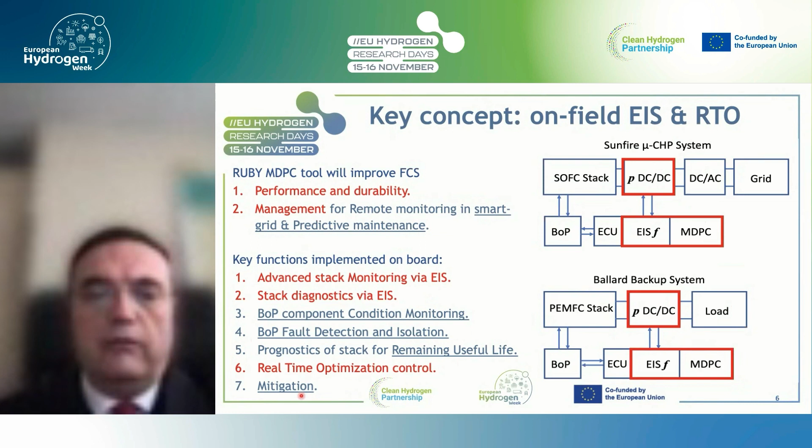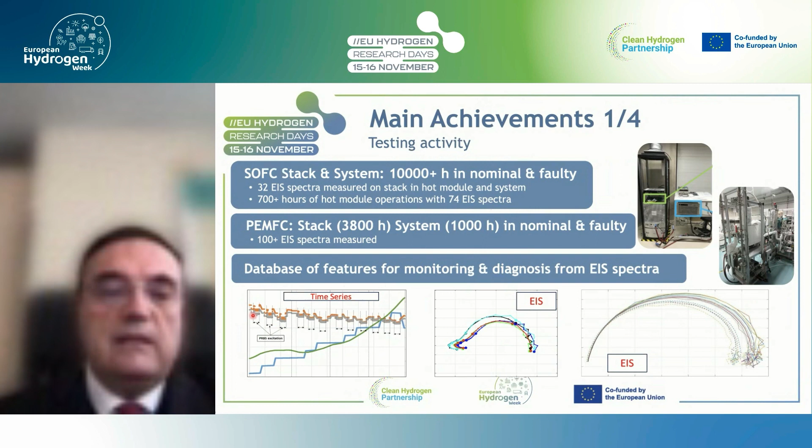And then we built a database of features for monitoring and diagnostics from EIS spectra. So this is, for example, on the right, one example on PEM stack, and this is on solid oxide, and this is a time series that have been recorded.

Then the second achievement is in terms of algorithm. So we have EIS diagnostics, the use of equivalent circuit modeling for parameter identification from the stack, the balance of plant diagnosis. We use also machine learning recurrent neural networks in order to have direct monitoring of the voltage on the field, and then the support of multi-scale analysis for solid oxide in order to better understand some phenomena like degradation, and also the state of health with advanced models, and also the RTO, which takes into account the current constraints or the constraints imposed by the users.

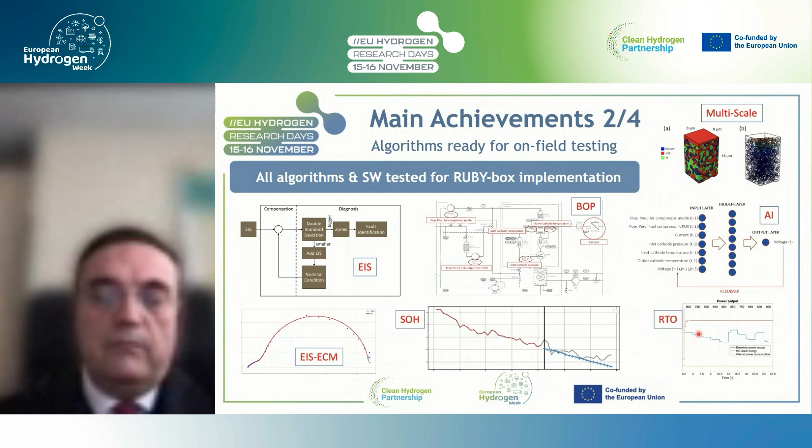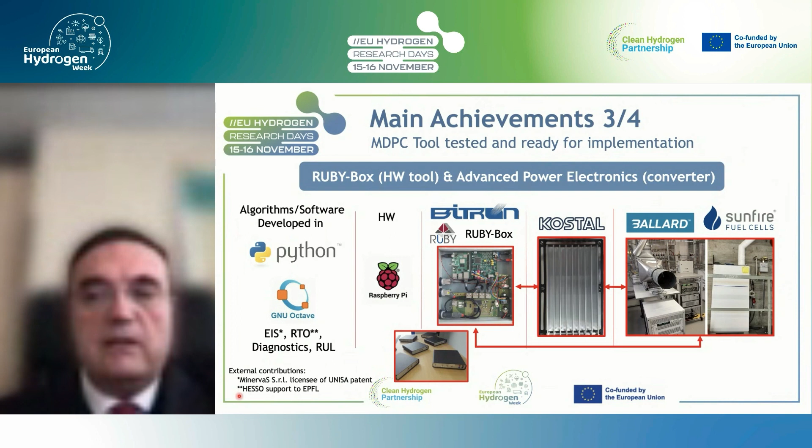We use algorithms that have been developed in open source languages, and then we are also getting the support of a third party like this company Minervas that has a patent from University of Salerno, and then from HESSO, which is a university in Switzerland.

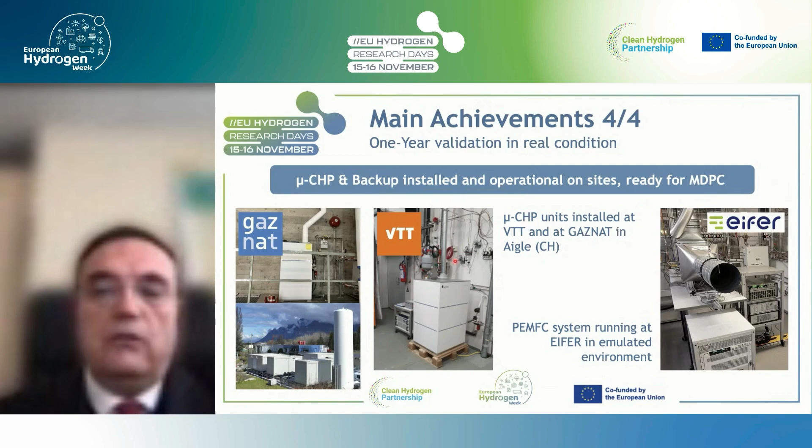Then the last achievement is the implementation of the 2 solid oxide micro CHP systems on the Gaznat site here in Switzerland. It is a real site, so we will not pay likely the gas that we are going to use, and then we will use this system in a real environment, and this is within the lab of the VTT in operational conditions. And then on the right side, the tests on PEM at EIFER.

We had one problem with one partner that left the project, and in 5 months, thanks to support of the JU, we were able to get on board Sunfire, and we are very grateful to Sunfire who trusted in our project, and of course to the support of Eleni and her colleagues before. And then also there was a risk in terms of shortage of electronic components during pandemics, but luckily this problem was overcome. Otherwise, the device would have cost more.

The device actually, in terms of Ruby box, will cost, as target of the topic, less than 5% of the overall cost. Then the challenges were to adapt the experimental activity to the new Sunfire system. So we had to run fast in order to have new experiments from another system. Then the new scheme of the DC-DC converter in order to fit in both systems; it was not easy to identify the configuration and also the topology, reconfiguring the power electronics in order to perform the EIS on the stack.

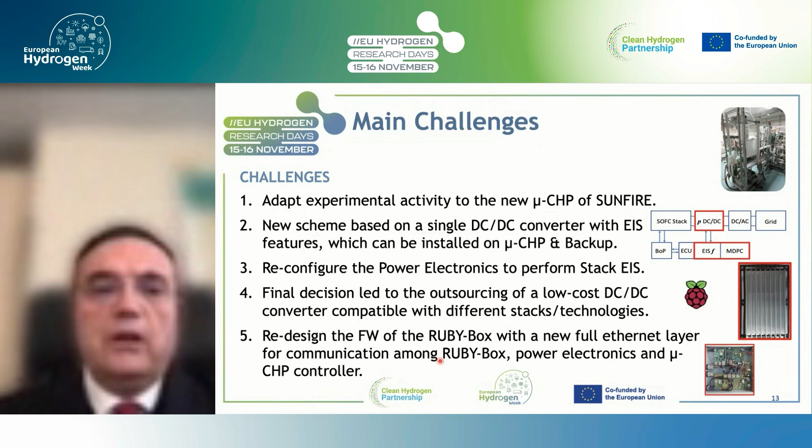In terms of exploitation, Sunfire will explore the integration of the converter and implement this MDPC tool in their device, and they are working in this direction. Bitron, which is the supplier of the hardware, who is developing the Ruby box, of course, they are interested in exploiting this solution also for energy meters, for example, for electric vehicle charging stations and other electrochemical devices, other than the potential application for fuel cells.

EPFL is working with HESSO. They identified in the frame of Innovation Radar a path in order to have the exploitation of the RTO algorithm. UNISA, Bitron, and this startup from University of Salerno, we are seeing the possibility to develop the Ruby box implementing, at least for the moment, one of the patents that is available, but of course there is room for other algorithms according to the needs and the interest of the other partners.

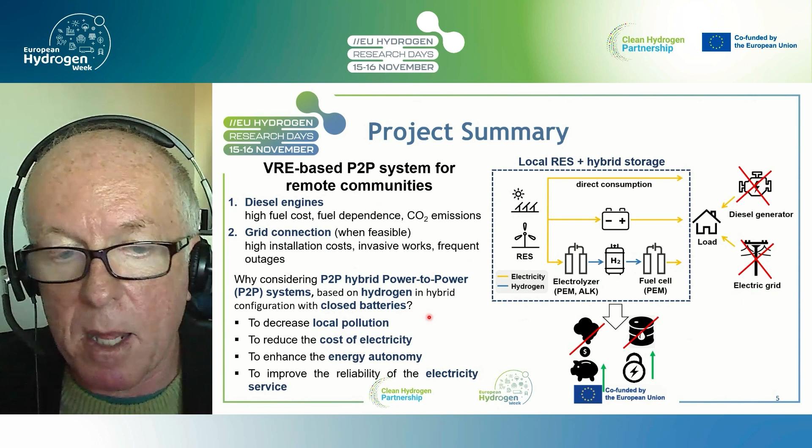To enhance the energy autonomy, so not to be dependent on outside fuels, and also to improve the reliability of the service. So this was the aim of this project, to demonstrate that these assumptions were true. So yeah, I think we demonstrated it. We did three demonstrators in the project. The system is, as you see, based on local renewables, local load, and a storage system based on battery, but dominated by the hydrogen system.

This we have done in three different sites. One in Trondheim, in Norway, with a system of 100 kilowatt load. I will give you more detail later. One in Agkistro, on the border between Greece and Bulgaria, with a load of 50 kilowatt. And the last one in Gran Canaria, in Spain, in the Canary Islands, with a load of 100 kilowatt. So the system is not big size, but medium size, but already significant, to demonstrate that the system really works and operates as expected.

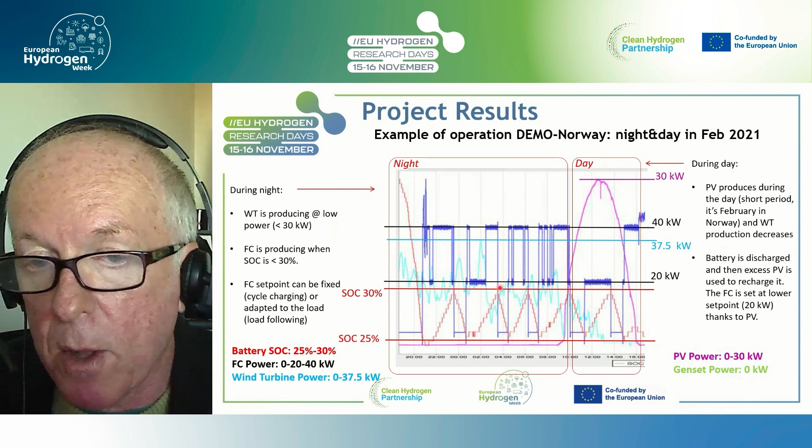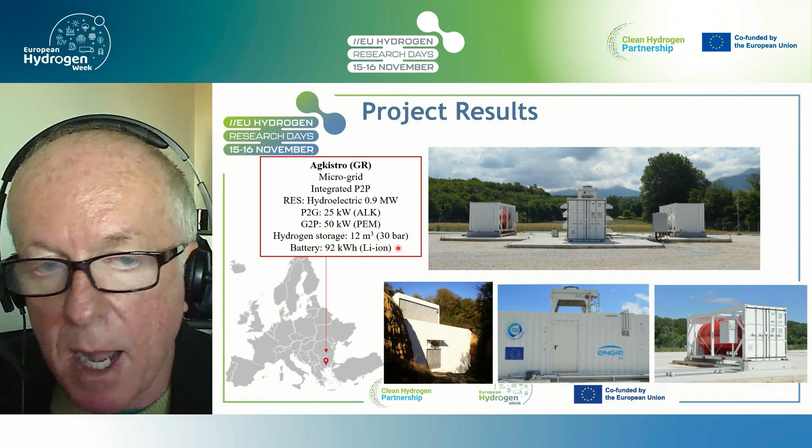Anyway, also here we did a continuous operation. You can see the system, also very elegant in my view, the organization of the plant. Basically, the efficiency we have seen along the year, of course, changed with the point of operation. The electrolyzer achieved efficiencies between 50% and 58% along the different months. The fuel cell was operating again in different points of operation, but between 43% and 51% of efficiency along the year.

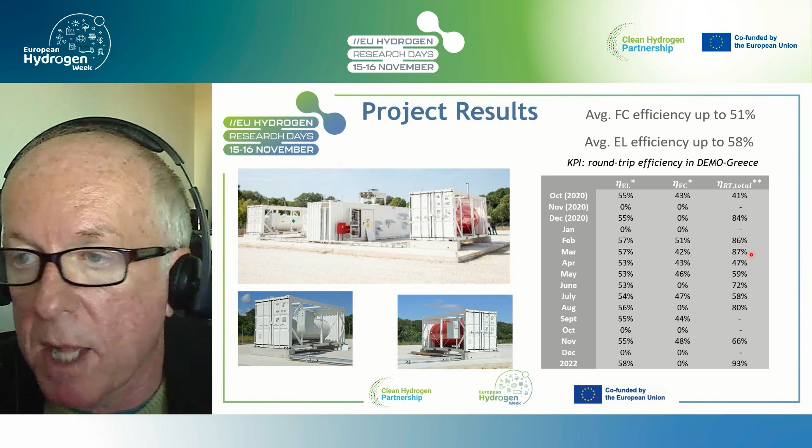The round trip efficiency, of course, depends again on the type of month. It is a mixture between the role of the battery and the role of the hybrid fuel cell and electrolyzer, so the chemical part, which is the hydrogen. So the value of the round trip can be very variable, from let's say 50%, 58% to something close to 90%, depending on the fraction of use of the hydrogen and of the battery. So a good level of efficiency in the round trip, but also considering that these are renewables that otherwise would be curtailed, so they are used to supply the load.

Last one is the installation in Spain, in the Canary Islands. This was the last installation. It has been done in a second part of the project. The system is based again on photovoltaic and wind. You see it is placed in Gran Canaria, in La Aldea.

So based on photovoltaic and wind, the electrolyzer is 80 kilowatt alkaline, and again 100 kilowatt of PEM fuel cell. Storage in this case is in terms of kilograms, so 50 kilogram at 200 bar. So higher storage, in this case there is a compressor, and 200 kilowatt hour of lithium ion battery. Here I cannot show the data because we are elaborating it, since it has been the last installation, so we need a higher amount of data to show you, but it will be in the deliverable, of course.

Some considerations in terms of results. The result has been good in terms of technological achievement. We did 13 months in Norway, around 2 years in Greece, and around 6 months so far in Spain. In terms of CO2 saved, CO2 all included, also as an LCA, CO2 equivalent, the remote scenario allowed us to save just in Norway around 1,000 kilogram of CO2 per megawatt hour produced. So of course there is no emission.

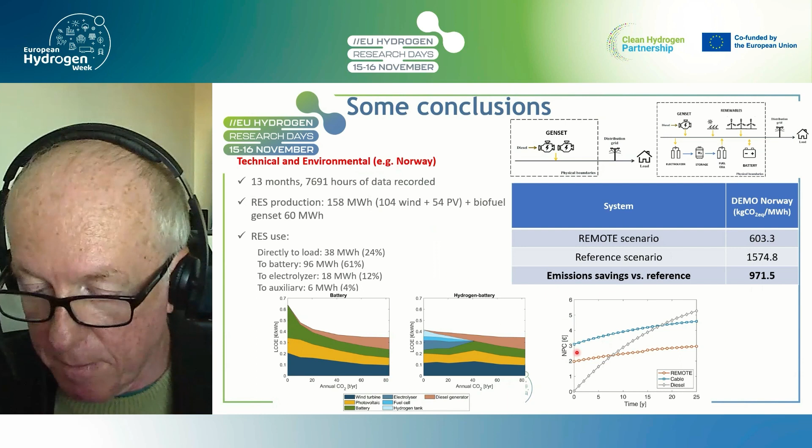So it is good for this type of application already now, economically. What we have achieved also, now we have completely developed models, so modeling tools for calculation and optimization of this type of system. In fact, we are using them a lot, they are very requested now. The next use will probably be the design of Hydrogen Valleys. We are now involved in 3 Hydrogen Valleys as a partner, and we will use this tool that we have developed in REMOTE to design this type of system in an optimal way.

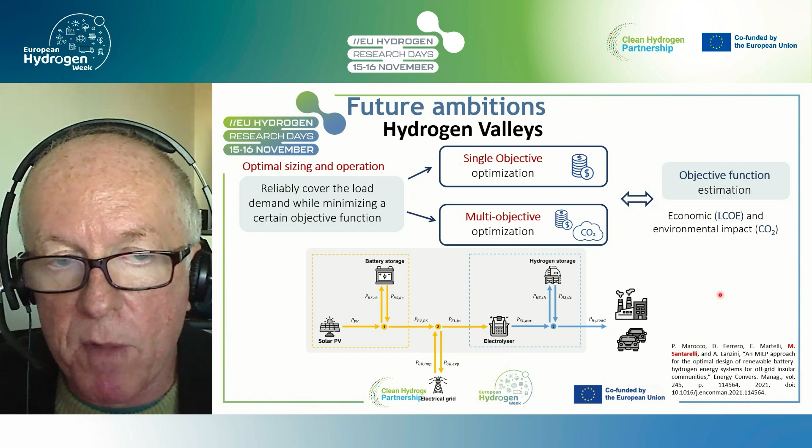So we have developed a tool for multi-objective optimization. We use a mixed integer linear optimizer that can optimize at the same time the cost and the emissions. So we have all the tools to design, let's say, a valley, so anyway a system where the hydrogen is used for storage, for mobility, for industrial use. This is a very good achievement of the project that we are going to use a lot.

Next step, after the project, this is a result of requests. We have demonstrated now that the system can work at intermediate scale, so below 1 megawatt. Now the requirements that we receive are for bigger sizes. There are a lot of requests for solutions in remote islands, remote areas like in the Alps, microgrids. Some districts in some municipalities are considering this type of system, local systems that want to rely only on local renewables.

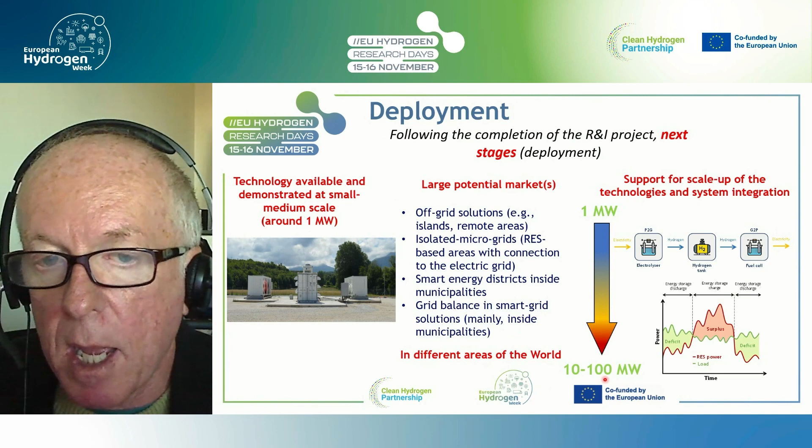So now the next step will be, with the technology providers, to move from, let's say, the size of 1 megawatt to something more ambitious, something that goes to 10 megawatt to 100 megawatt. This is especially to explore this type of system out of Europe, even only considering the remote communities.

So of course, I think the market of this type of system is much bigger than only remote communities, but even only considering remote communities, most of which are based on local diesel generators, you can imagine we are around 750 million people living in this type of site around the world. So it's not a niche market for hydrogen systems in this case. And we can consider that this can save at the global scale around 1.5 gigatons of CO2 per year, even only considering remote communities. So I think this can be a good market possibility for European technologies.

And for dissemination, we did several activities in terms of conferences. The last conference was in the Canary Islands, EHEC, in June. We produced a paper, this one, EHEC 2023, as usual, and we won two big awards. One was the European Sustainable Energy Week Award in 2020. It was the winner of the Innovation Award. The last one was basically 2 weeks ago.

It was in Oslo. An award supplied by the Svalbard research institution, because they are interested to implement this type of system in local communities like Svalbard or like the north of Canada for native people that live there, and also for local automatic weather stations. So now we will produce an automatic weather station based on this type of hybrid system using hydrogen.

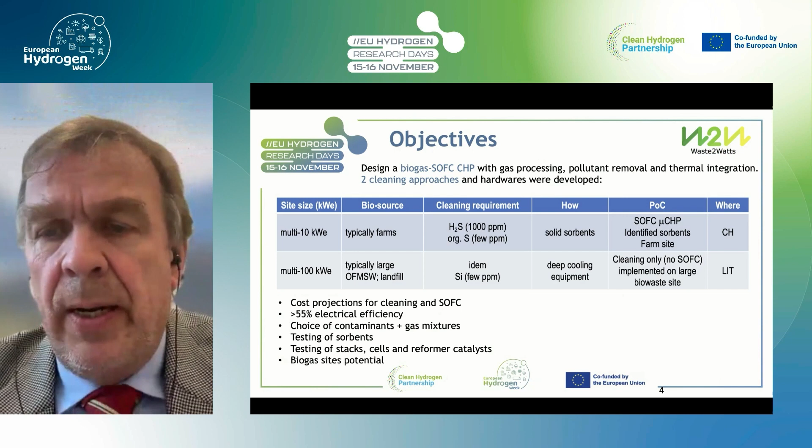So the main objectives: this project was strongly concentrated on cleaning of the gas, developing along 2 lines. One for rather smaller applications targeting farms where sulfur has to be removed, the approach being sorbents. And there we are developing a site in Switzerland. And then there was also another development only working on the cleaning itself, going with a new high-risk approach of deep cooling of the gas to remove sulfur, but also siloxanes.

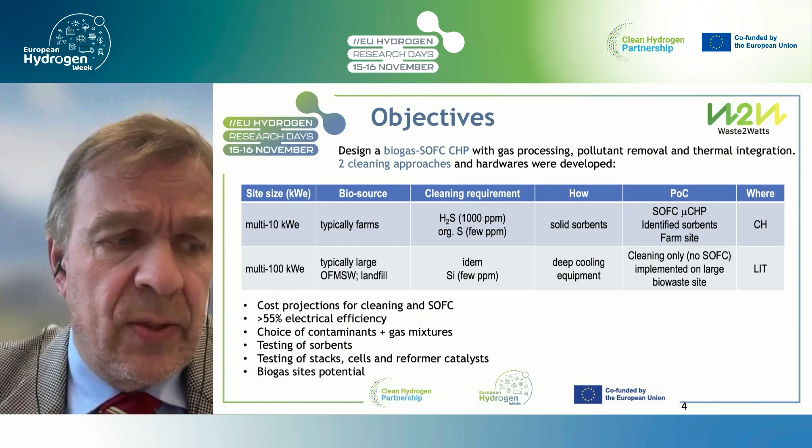And they are targeting larger sites, typically large farms, but also large municipal solid waste biogas producing farms or even landfill. And so there's a range of objectives that were involved, the cost projections, reaching high electrical efficiency, and of course a lot related to the contaminants in biogas and testing with them.

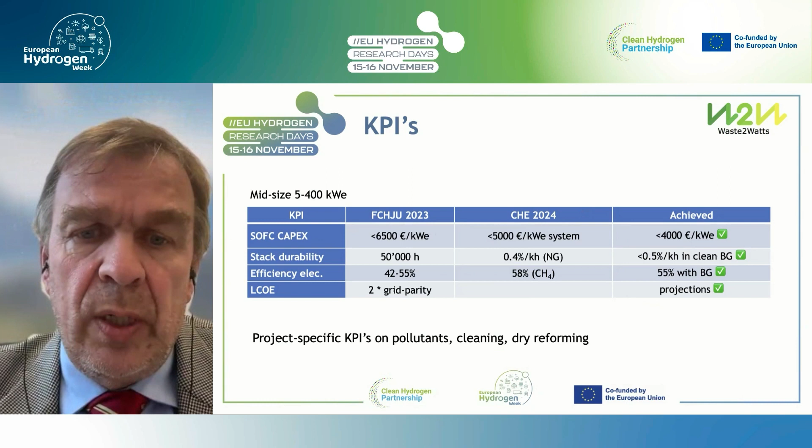So in terms of KPIs, these are general KPIs for small mid-size power systems in terms of capex, durability, efficiency, which are all achieved, let's say, in projections, but also partly in testing in the project. But then we had also very project-specific KPIs that are all related to the pollutants, the cleaning, and also dry reforming, because of the specifics of biogas containing already CO2 as a reforming agent.

So we first started by laying out a system, including this target of not having to supply an external water source. That implies recirculation of the anode exhaust, and we did this in 2 ways: either cooling, condensing the exhaust, and in this way moving to a dry reforming approach, or a hot recirculation where we mix fresh biogas with steam and CO2 from the exhaust, which has not been removed, and this is then a mixed

reforming. And we did this for both SolydEra and Sunfire systems, which distinguish themselves by the operating temperature because they're electrolyte and anode supported stacks, so 750 and 850 degrees. A range of sensitivities has been taken into account: the reforming temperature, the fuel utilization, the recirculation ratio. In all cases we identified a range of conditions where high efficiencies can be achieved with both systems. This then set us, for the rest of the project, 4 gas compositions for testing: one dry reforming based, one mixed reforming based, for both Sunfire and SolydEra type stacks.

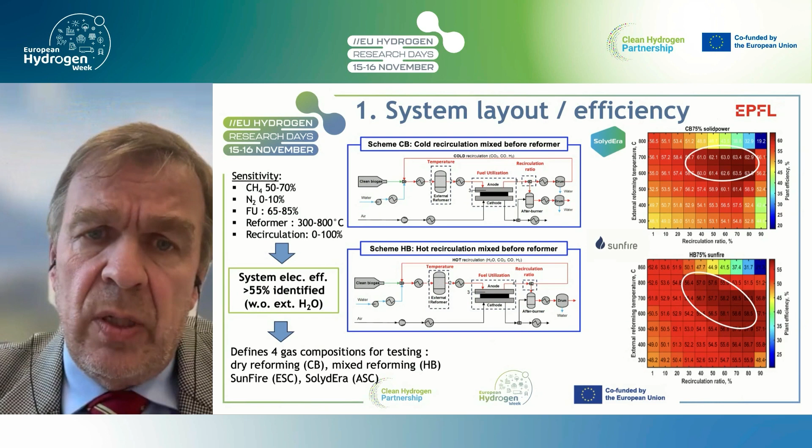In addition to the classic H2S, also other sulfur compounds, dimethyl sulfide, thiol, methyl thiol, and COS, also in a realistic gas matrix, and not just as mixtures, and not just as a single contaminant in, for example, only hydrogen. Likewise, lots of studies were done on sorbents. Also here a database has been compiled. In terms of testing, 21 different sorbents were tested from different suppliers, and this was done in a realistic gas matrix.

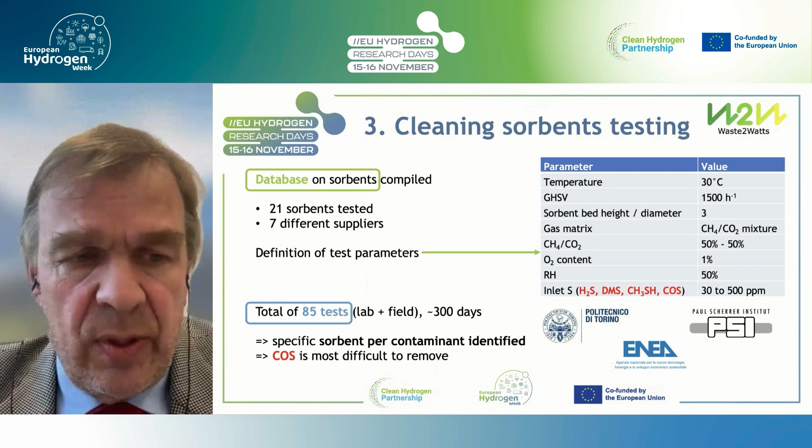So a total of 85 tests have been performed by 3 different labs. And this then allowed us to deduce from this test campaign how to approach a particular site, depending on the contaminants that are there, because we have identified sorbents that are good for certain contaminants. And we found out that, for example, COS is quite a difficult one to remove.

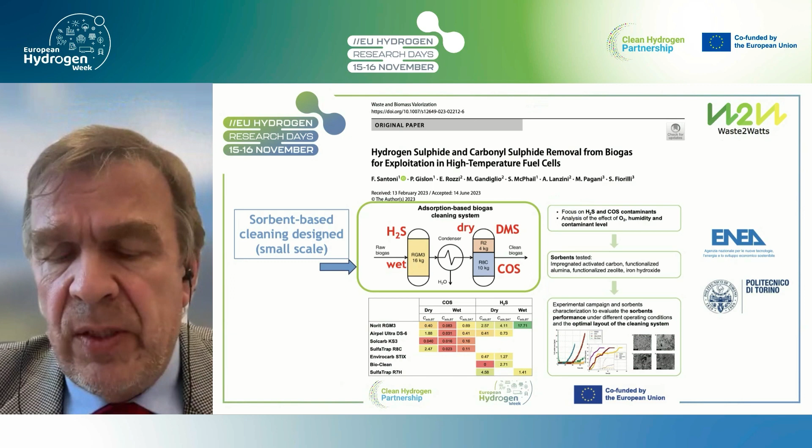And this then led us to the design of a cleaning system, sorbent-based, which you can see here. It's also published in the recent paper, and you see the approach in the green box, where we first take out H2S from the wet raw biogas, then we condense, we dry the gas to improve then the adsorption of DMS and COS on other specific sorbents.

I cannot go in detail in all of the other tests that were conducted because there's too many to report, but we did lots of testing on reformer catalysts, on cells, and on stacks. I just show you one example here of a stack that's actually still ongoing from SolydEra, where we are poisoning it with dimethyl sulfide at different levels.

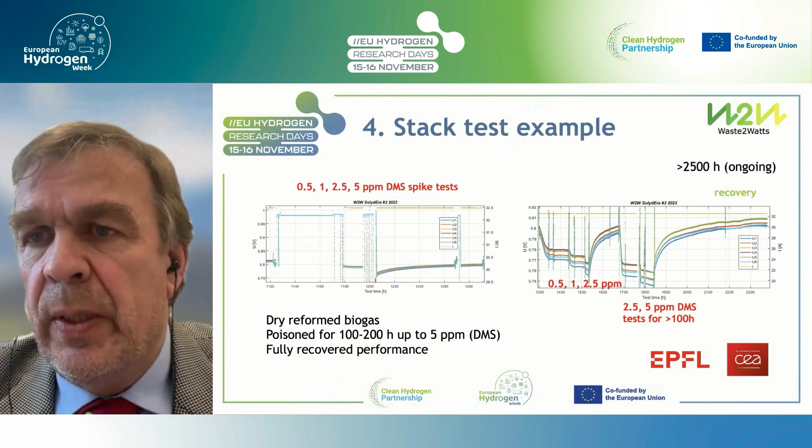We see the typical quick reaction of a stack performance to sulfur poisoning, that there is a fast drop, but then it continues on stable. And if the pollutant is removed, the performance actually practically fully recovers, which is really good news. And by the way, this stack is running in dry reformed biogas, also showing stable performance in that gas.

So now we are equipping a pilot test on one site in Switzerland, where an SOFC is actually being delivered, and commissioning is probably presently ongoing. There have been delays, as mentioned before, for a number of reasons, but as partners we are committed to continue this also post project. The site owner is very interested, and SolydEra is interested, and we have designed the system in such a way that it would be easy in future also to exchange new sorbents that are cheaper and that we can also test in different campaigns.

Then another approach, which was very ambitious, has been entirely designed and developed by Bio-Komp in collaboration with Politecnico, and this is then for large scale cleaning based on cooling, as you can see here. So liquid methane is used in a reverse Stirling engine cycle for deep cooling, -70, even down to -100 degrees, of biogas to precipitate H2S and siloxanes and part of the CO2.

This has been assembled. This has been delivered. It is now on site, and it is also being commissioned. And this is going to operate on 100 cubic meter per hour gas flow rate. The cycle, of course, has a certain consumption, but it remains within acceptable, let's say, limits, and also cost-wise, as a first prototype with still potential for cost reduction, it fulfills the targets of the cost of the cleaning that had been set at the outset.

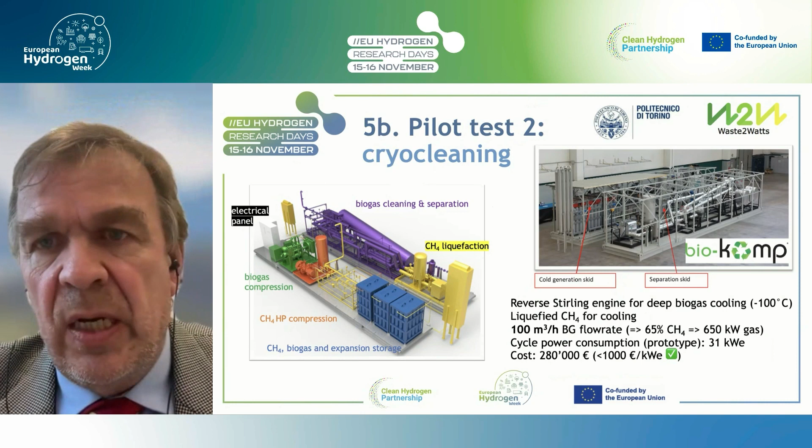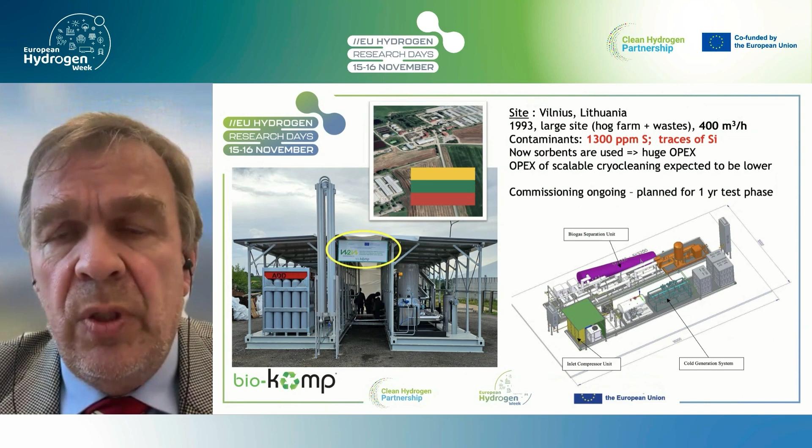So here some more pictures. So here you see the actual system delivered on site with the Waste2Watts logo and poster there. It's been supplied to Vilnius, Lithuania, which is actually a customer of Bio-Komp. The biogas contains a lot of sulfur, contains also some siloxanes. Presently, this site has an enormous OPEX cost because it uses sorbents, and so it hopes to reduce this OPEX cost by testing this completely novel system. And also Bio-Komp again here is committed to continue this test for the next year.

So in terms of exploitation, this last site is actually a business case directly for Bio-Komp, who's also filing an international patent. The smaller previous site that I've shown, we also intend to run it for 2 years, depending also on some additional funding. As mentioned, we want to test different sorbents there. It is basically low OPEX, low CAPEX, and easy to dismantle as a site. SolydEra is now looking for a digester company to team up to offer complete solutions for biogas SOFC in the range of a couple of 10 kilowatts, which is interesting.

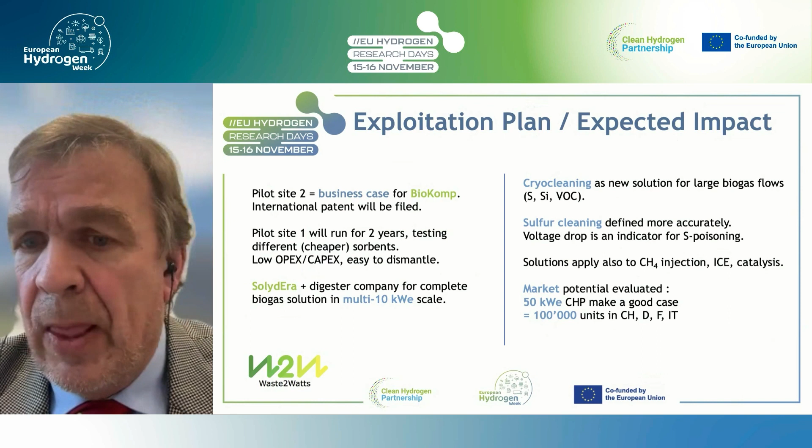And in terms of expected impact, this cryo cleaning is pretty novel as a new solution for cleaning large biogas flows. We definitely have much more insight also on sulfur cleaning requirements. We defined this more accurately, and the solutions that were developed are actually also quite generic. So not only for fuel cells, but also for biomethane injection, for the engines themselves, and also for catalytic reactors. We evaluated in detail market potential, and we think that 50 kilowatt is a nice size. And we also did a quantitative evaluation for the 4 partner countries and come up to a potential of 100,000 units in this power scale.

Finally, in terms of risks, this cryo cleaning installation is definitely a high risk, but with a high potential reward. We hope that results will be positive. There was a risk with the small scale demo in terms of the funding, so we really downsized and minimized the hardware cost so that we can still go ahead with this testing and exploit it and also have a real impact there in the coming years.

Sulfur cleaning remains a challenge. We have to go down to a ppm, so thanks to this project we also came up with new ideas, alternative methods to using sorbents. Biogas also remains a complicated field. It has to be regulated, it has to be simplified, and farmers have to be supported.

And then finally, with this project, we are going a little bit against the mainstream current thinking, which is using biogas to separate out CO2 from it to go for biomethane, inject it into the grid and do large scale, which is then basically going to be used somewhere for heating. We think this is a pity because it still leaves a lot of biogas unused, which is in agriculture, in farms. We think 50 kilowatt makes a lot of sense.

Obviously, digester cost has to further come down, and also SOFC system cost has to come down. But then with these systems, we can deliver winter electricity, which we think is definitely a lot of added value.

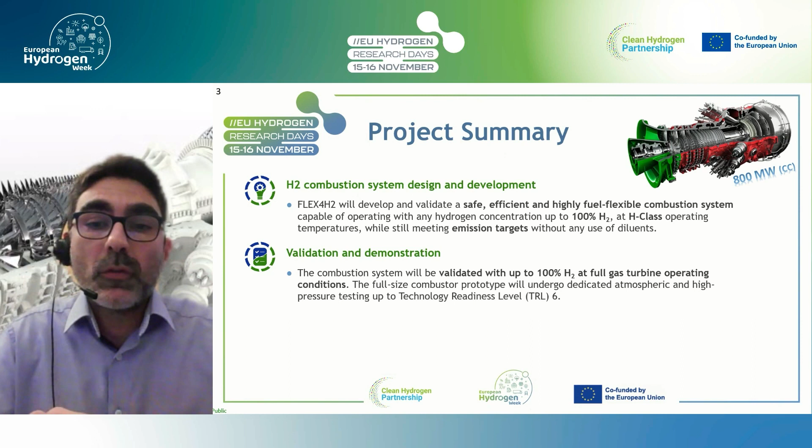And ultimately, the development of pathways for the exploitation of the project results, thus a firm contribution to the EU Green Deal towards decarbonization of the overall electric power sector.

So the consortium is composed of 9 partners organized in 6 work packages and led by Ansaldo Energia. So work package 1 drives the combustion system development overall, while work package 2, led by SINTEF from Norway, in close cooperation with Cerfacs in France, looks after the advanced numerical modeling essential for the development of the combustor as a whole and its own parts, as well as the operation concepts.

Work package 3 is led by the Zurich University of Applied Sciences in Switzerland and focuses on the thermoacoustic optimization of the system, while work package 4 covers all the testing and validation activities together with the German Aerospace Center DLR.

Then we have work package 5, led by ETN, the European Turbine Network, which covers the communication and dissemination aspects, and in particular the exploitation of the results, leveraging also the inputs from the Italian electric utility Edison. And ultimately, work package 6, led by Ansaldo and ARTTIC Innovation, is integrating overall the work packages together and ensuring proper project management of the whole FLEX4H2.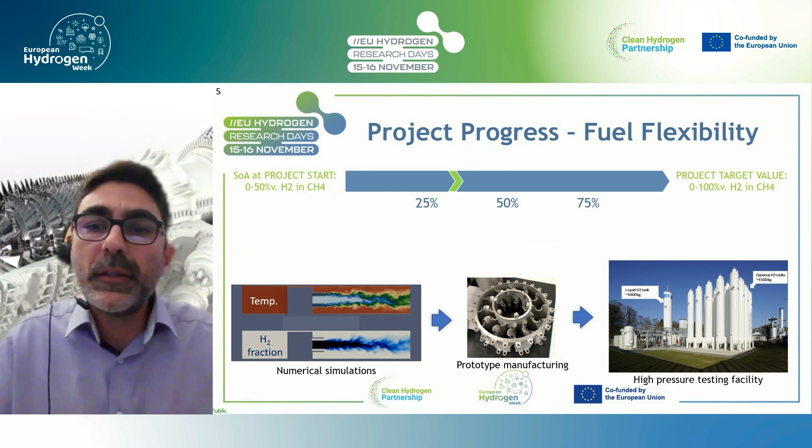The main development steps include numerical simulations, which then feed the optimization of prototypes that are manufactured and also fully instrumented for proper characterization of the performance of the new technology features, to ultimately test the new design and its operation at full engine conditions. And we can get a bit of feeling about the massive required hydrogen infrastructure in the image down here.

As of today, we completed successfully the first design iteration out of the 3. So this loop will be a feedback loop that will make us grow and enhance the capability of the technology. So we completed just last month the first iteration. So we are at roughly 30% of completion of the project, and we already could have the system capable to work with any blend of hydrogen and natural gas, including 100% hydrogen, but keeping the full firing temperature up to 70% hydrogen and having some derating for 70 to 100%. And by the way, 100% operation in the rig, we had it just 2 weeks ago.

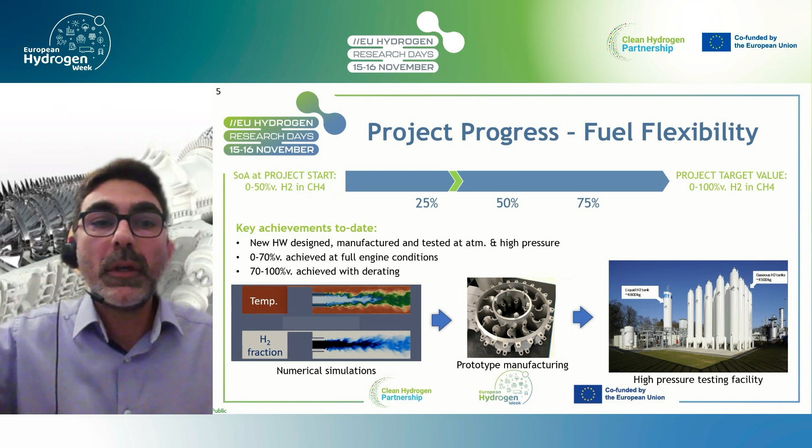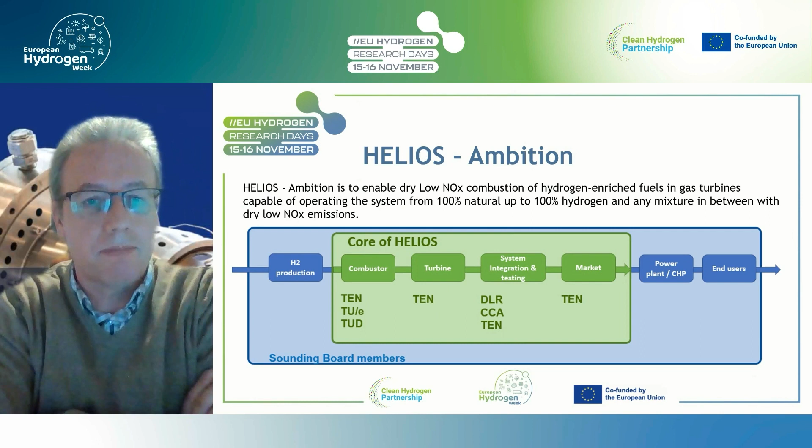So what in the end does it mean? One of the key aspects is the low NOx emissions. Low NOx means less than 9 ppm per volume. As you might know, NOx is in the Netherlands, for example, a high burden, in the sense that new facilities are a bit limited due to the expected higher NOx emissions, and you need to have really low NOx emissions to make a next step, because the industry is a little bit blocked in greening their facilities in the Netherlands in this respect. NOx is one of the aspects that's a huge burden in that sense.

Then, as mentioned, it should be able to run at 100% natural gas, but also at 100% hydrogen, and all the steps in between. And the high challenge is the high firing temperatures. Thomassen Energy has shown in a previous project already that they can run the burner at gas turbine E-class conditions, but higher firing temperatures means also to go to higher gas turbine classes like the F class.

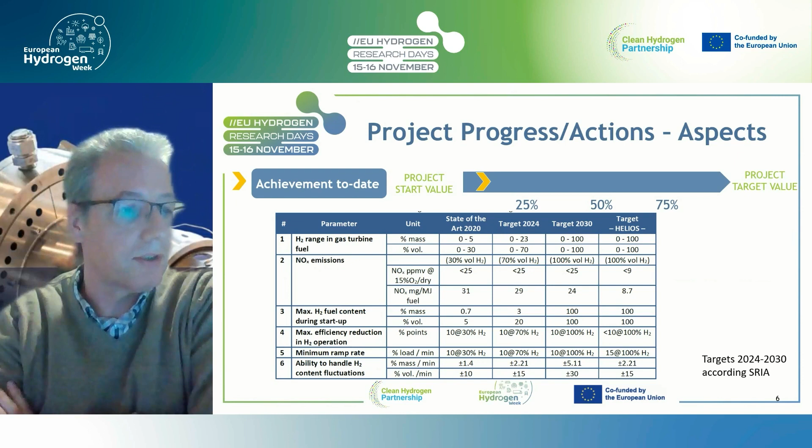So since we're pretty new in this area, we're still developing and building up everything, also in the communication activities and so on. So the website is under construction at the moment, and we already have a LinkedIn page working and running. And recently we had visitors at the university from the European Parliament, and we were happy that we could present there the HELIOS project as a showcase to this ITRE committee.

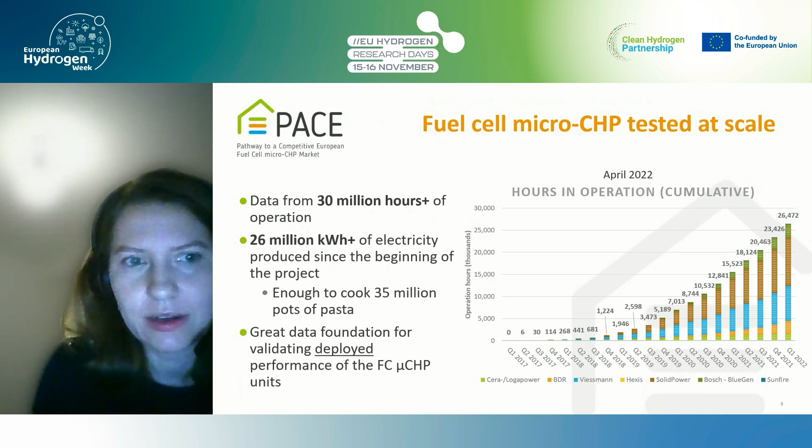And this is a good foundation to actually be confident about the performance of fuel cell micro CHP units in a real life context. So based on this data, we see that the rated efficiency of the systems has been proven. All of the systems have an efficiency exceeding 95%, and 97 to 99% reliability. This means that the faults registered during the operation of these products have occurred in less than 1 to 3% of the time they've been monitored.

As mentioned, more than 2,500 units installed, which was one of the project objectives, and 90% customer satisfaction. On the customer satisfaction, because this was really a project that looked into products that are placed in people's homes, PACE surveyed more than 1,700 field participants, and we've received quite good feedback from the users, with more than 75% of PACE trial participants having rated either positive or very positive several items in the survey: the product design, environmental impact, electricity generation, and comfort and warmth. And we've also received quite favorable testimonials from the trial participants.

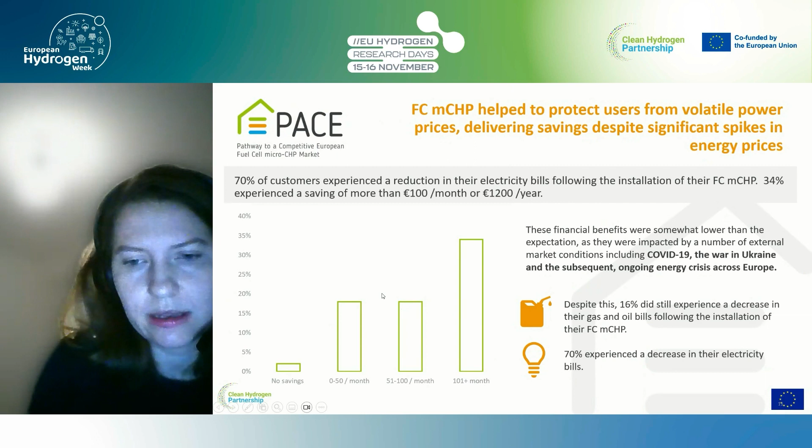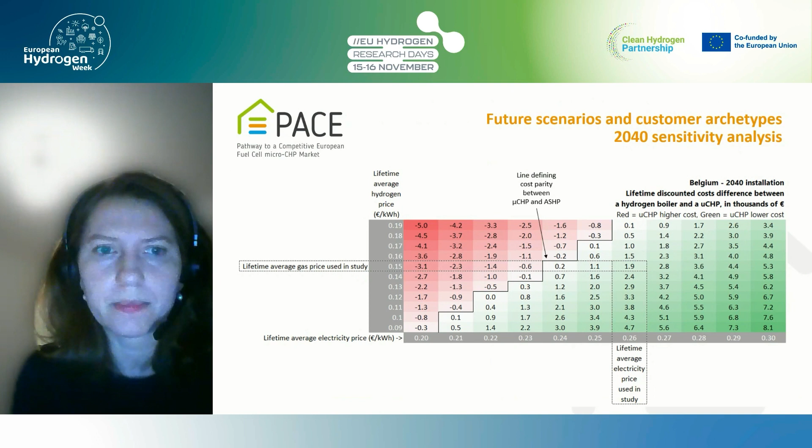This is another example of the work that has been done as part of the project, where we're looking at different scenarios for the future for fuel cell micro CHPs, taking into account a range of hydrogen prices. We cannot know now what hydrogen will cost, or what green hydrogen will cost in several decades. However, we can see in which situation fuel cell micro CHP using hydrogen can be cost effective compared to other competing technologies. And there are many cases where fuel cell micro CHPs can actually be a good product in the context of hydrogen being used for space heating and electricity production.

So in terms of the future scenarios and customer archetypes, we concluded that the installation of fuel cell micro CHP is beneficial in high energy consumers. The emissions can be impacted by electricity decarbonization, of course, but this can be mitigated, as we've seen in the other projects presented previously, by considering different scenarios or countries, also optimizing the system operation, replacing fossil gas with biomethane or renewable hydrogen, and also by taking into account the system benefits and the complementarity with heat pumps that we see as the main competitor or the main other option on the market today.

And then in areas where hydrogen is available, fuel cell micro CHPs are seen as a strong alternative to hydrogen boilers because of the efficiency benefits and also because of their production of electricity in addition to heat. With the PACE project, we were also able to showcase the European industry leadership in the area of fuel cell manufacturing. We've estimated that more than 200 million euro were invested by the European industry in stationary fuel cells over the past 5 to 10 years. This is quite impressive and it needs to be taken into account.

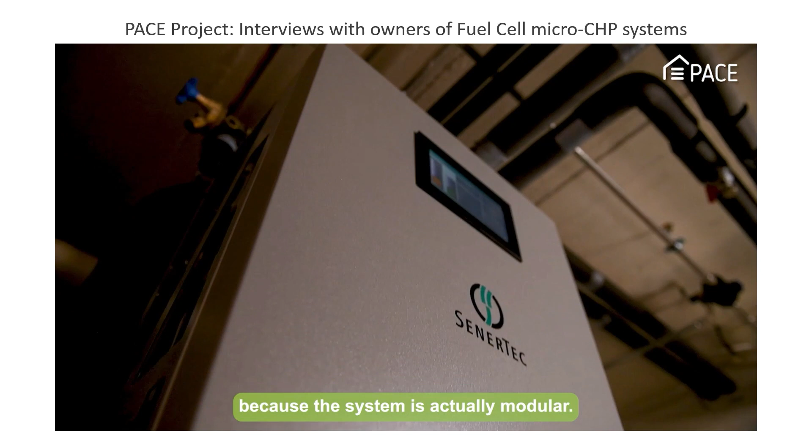The integration of the system into our house was the benefit, of course, of the system, because the system is actually modular. So it has, I guess, 3 bigger parts, and also the installation was quite easy, comparable to bigger systems.

Okay, that was all from the PACE project. Thank you very much, Alexandra. Thank you for the nice overview and the results that you shared with us from the PACE project. I know that you have a commitment in 5 minutes, so we can start already the Q&A session. Unfortunately, we will only take very few questions, and I would like to start with you.

We have 2 questions that have been triggered by your presentation on micro CHP. The one is about the competitiveness compared to heat pumps. It's an issue that you have thoroughly studied, I would say, during the project, instead of trying to hide, let's say, this kind of competition.

And the second one is a more generic question about the micro CHP market, because in the last months we have seen some traditional players or businesses focusing on micro CHP unfortunately trying to shift their focus towards bigger applications. So I would like to have from your side a general comment on the micro CHP market in Europe and the competitiveness related to the heat pumps. Thank you. Yes, thank you as well.